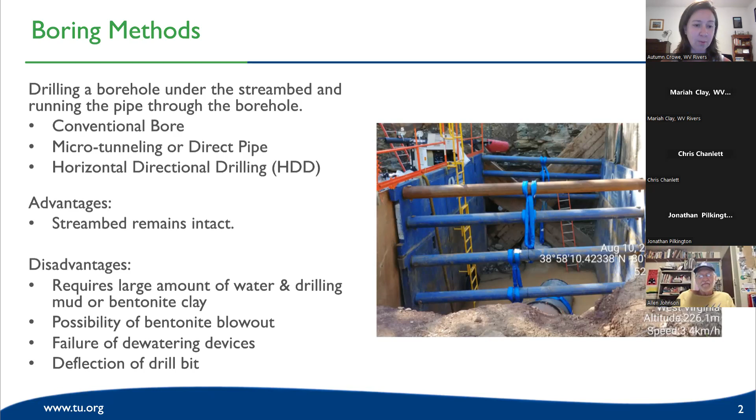The advantages of boring is that the stream bed remains intact. But the disadvantages are that it requires a large amount of water and drilling mud or bentonite clay. There's a possibility of a bentonite blowout, a frack out, or inadvertent return - it's labeled different things in the industry. There can also be a failure of a dewatering device, and I'll explain what that is. There's also a possibility that the drill bit could get deflected from a large boulder.

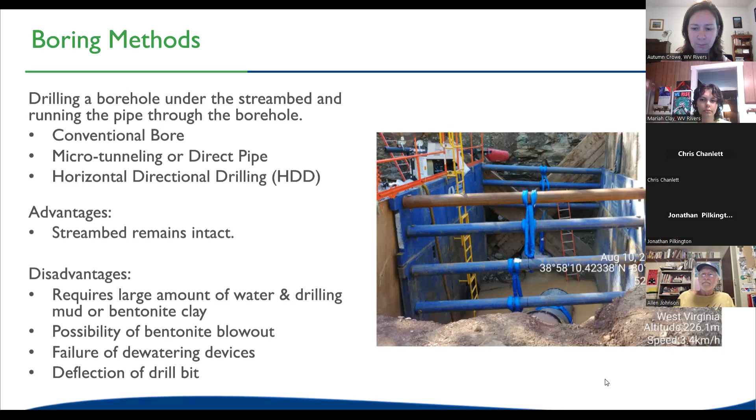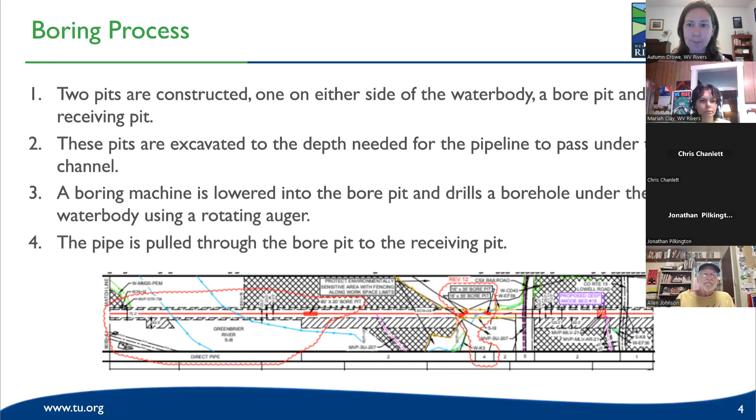So the boring process: there are 2 bore pits that are constructed, one on each side of the water body - the bore pit and the receiving pit. These pits are excavated to the depth needed for the pipeline to pass under the stream channel. A boring machine is then lowered into the pit and drills a borehole under the water body using a rotating auger. The pipe is pulled through the bore pit to the receiving pit.

This is an example of the schematic for the Greenbrier River crossing. If you can see my arrow, on river left is the excavated bore pit where the boring will occur, and then moving through under the river to river right to the receiving pit.

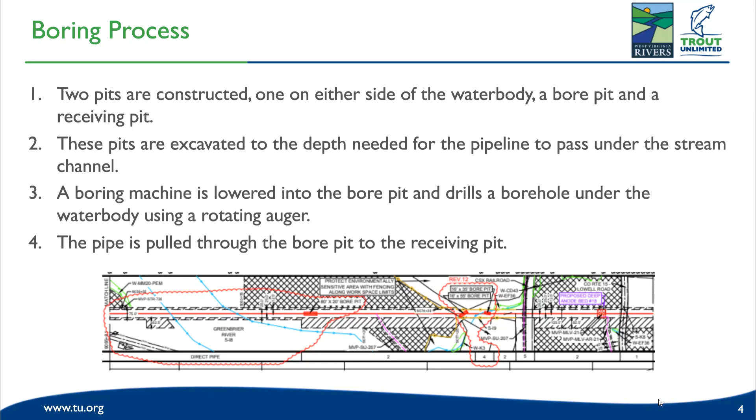So Mountain Valley Pipeline is planning to use the direct pipe boring method. This is a micro tunneling boring machine that installs the pipe in one single pass. This method uses lower pressure than the horizontal directional drilling, but the drill bit is subject to deflection from cobbles or boulders greater than 14 inches. Operations must continue nonstop to prevent the tunnel from collapsing. It also requires 1 million gallons of water mixed with a bentonite clay slurry used to lubricate the drill bit.

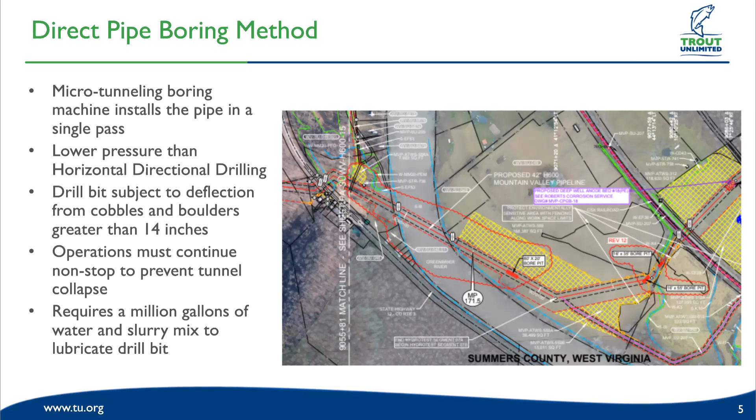For the Greenbrier crossing in particular, there are several problem areas where construction could go awry and issues could occur. They're boring 1,250 feet diagonally under the Greenbrier River, 13 feet below the river bottom. Like I just mentioned, they're using water withdrawn from the Greenbrier River, mixed with that clay to lubricate the drill bit.

The bore pits will be approximately 10 to 13 feet deep and 20 to 80 feet in length. At the starting pit, it's going to be 80 feet in length, and the receiving pit would be 20 feet in length. So those are quite large pits.

Pumping to dewater the bore pits will be required 24/7, and has potential to exceed the capacity of the dewatering devices. Those bore pits are going to be under the water table, so they're going to fill with water, and pumping will be needed to dewater them. Like I mentioned, the drill bit is subject to deflection from cobbles and boulders greater than 14 inches - so as they're drilling, if they hit a big boulder, it could steer the drill bit in a different direction.

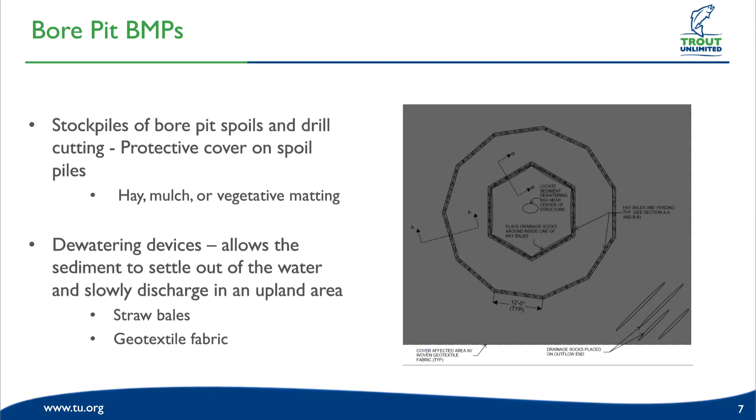And that dewatering device, there's a picture of it here that's in their plan. So there's a sediment dewatering bag within the center of the structure, and then there's two rings of straw bales with geotextile fabric. It's designed to contain all of that muddy water to keep the muddy water from entering the river. And then there's some drainage socks placed on the outflow area.

So potential impacts from borings. Mountain Valley Pipeline has already done some borings along the route in West Virginia, and we've seen those go wrong. As I mentioned, the groundwater enters the trench or the bore pit and produces the sediment-laden water. They pump that water out into a dewatering device. But if those devices are not sized properly, or they're not designed properly, or not built properly, then they're subject to failure. And that would release sediment-laden water into the stream or river and create a violation of water quality standards.

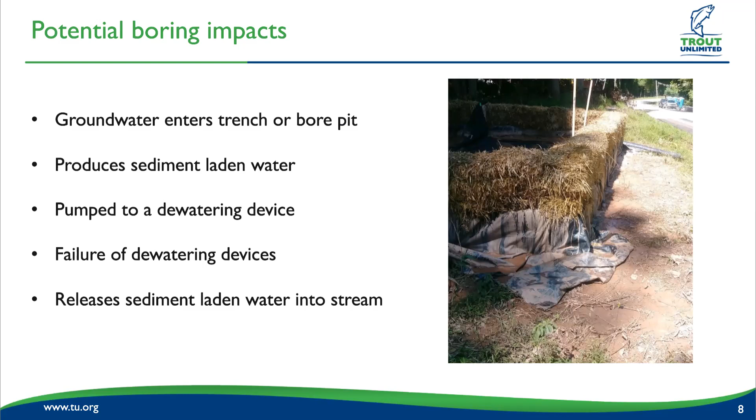There's also a possibility with all of the drill cuttings and the soil that they're excavating. There's a possibility of improper handling of that, or not having the proper BMPs to protect that. And if precipitation interacts with those drill cuttings or soil piles, then there's a potential for runoff and sedimentation and erosion.

And then the clay slurry mix that is going to be used to lubricate the drill bit, there's a massive amount, 1 million gallons potentially of this clay slurry. And we've seen on other pipeline projects that slurry can easily get out of hand and pollute a wetland or water body. So all of that is going to have to be handled properly.

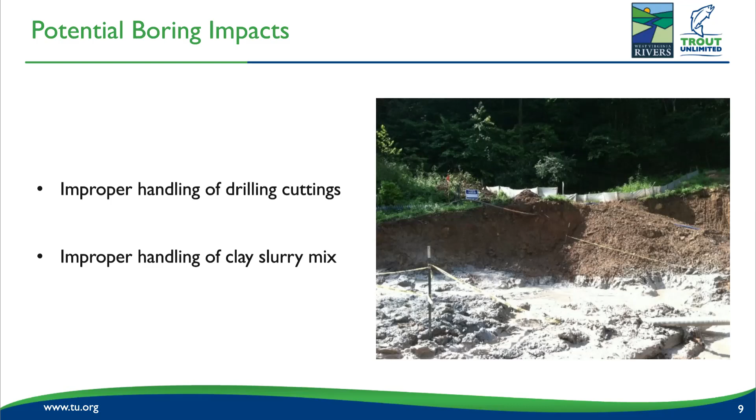And I mentioned this earlier, the bentonite blowout. So that is if there is a fracture in the bedrock when they are doing this drilling under the river with all of this bentonite clay. If that bentonite enters a fracture and is able to release into the water body, that's what's called a bentonite blowout, or an inadvertent return, as it's known in the industry.

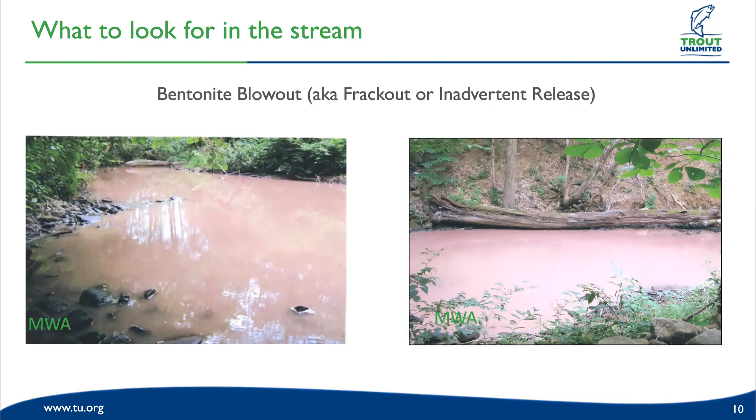So with that, I'm going to hand it over to Mariah, and they can explain how we at West Virginia Rivers have developed this StreamWatch app that can help citizens report potential pollution as they are observing the construction out in the field.

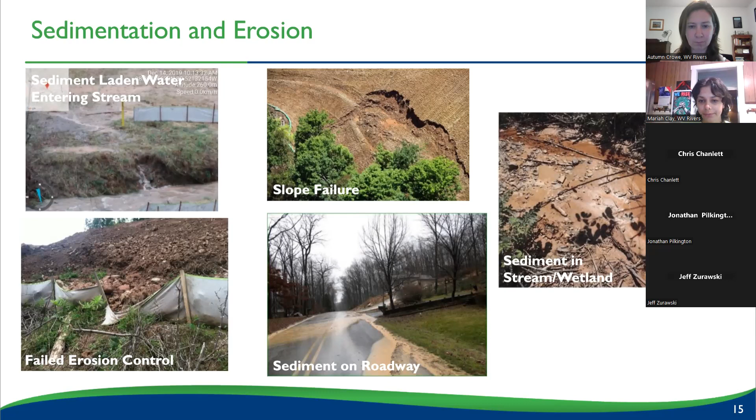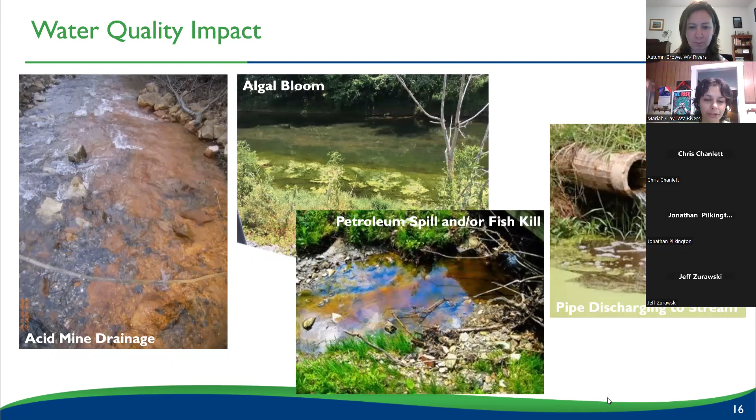And moving on to water quality impacts, these can have severe consequences on the ecosystems. These examples include acid mine drainage, algal blooms, petroleum spills, and potential fish kills. Also pipes discharging pollutants into the stream, which you can see pictured there. The next is solid waste. This can include litter in the stream, open dumps, tire dumps. Each of these disturbances can harm the environment and wildlife in different ways. Some disturbances you might encounter are not directly related to Mountain Valley Pipeline construction, but they're still important to document and submit.

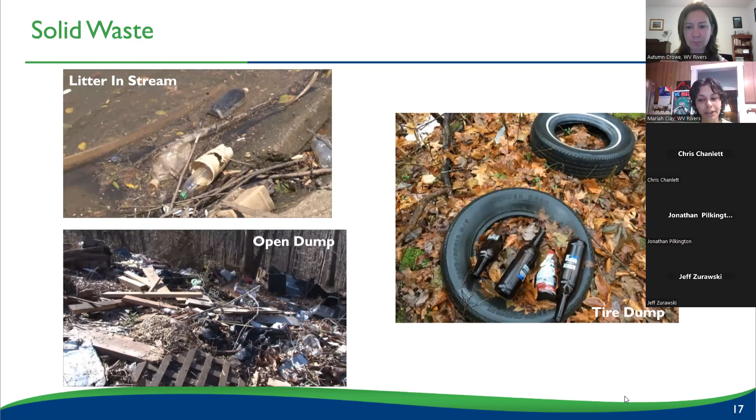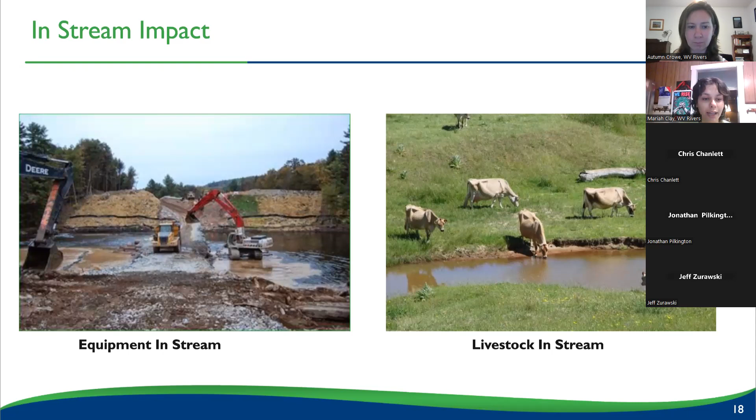In-stream impacts, these are crucial to monitor. We look for equipment in the stream and also things like livestock entering the water. Environmental regulations often restrict the use of heavy equipment in streams to prevent sedimentation, erosion, all these things that cause habitat disturbance. However, some permits may allow for a single pass of equipment in streams under specific conditions. This one pass rule typically permits equipment to enter the stream to place construction materials like timber mats, which I'm sure you all have seen and are familiar with.

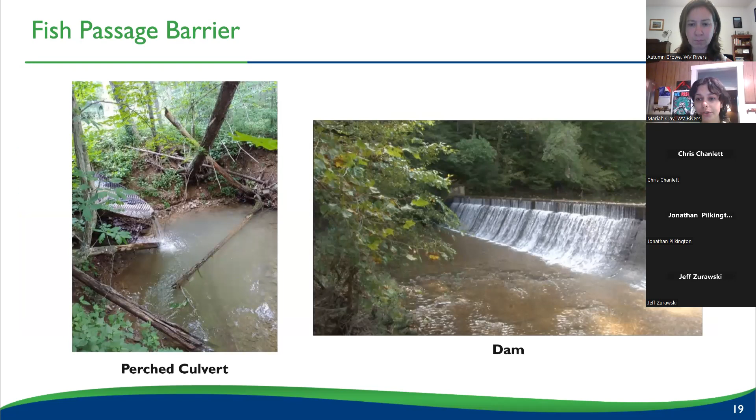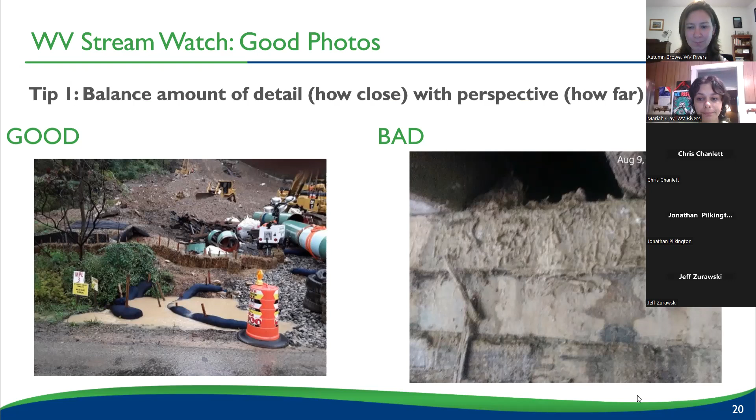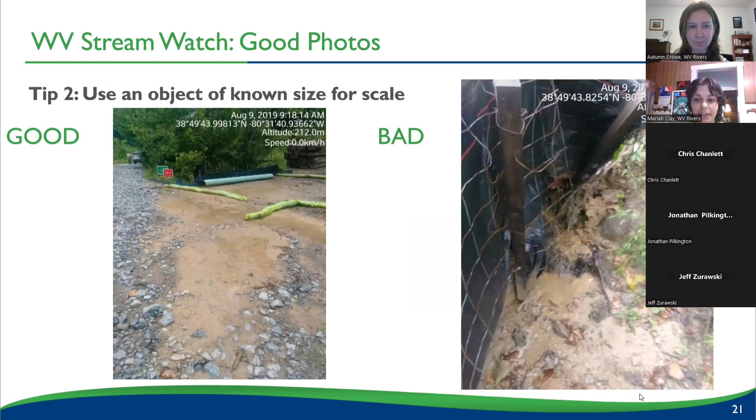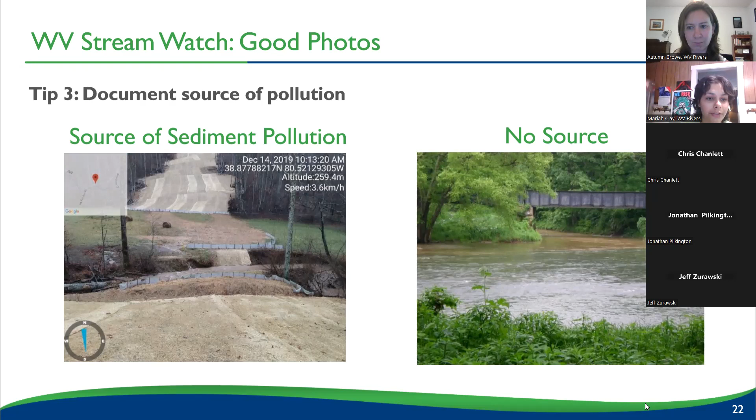And documenting pollution sources. Remember to document and photograph the source of the pollution. This provides vital context and helps us address the issue effectively. So in the picture on the left, we have the source of sediment pollution, and in the picture on the right, we see the pollution, but we can't identify the source in that picture. So hopefully that gives you context of what we're looking for when you're out in the field doing these submissions.

Okay, so I know that was a lot of information, and I saw some questions coming in. So let's start with those questions that are in the chat, and then if you have additional questions, you can drop them in the chat, or once we get through these, there'll be an opportunity for you to unmute yourself and ask additional questions. So yes, it's 1 million gallons of water that is approved to be withdrawn from the Greenbrier River. So that's 1 million gallons, not 1,000. Okay, that was already answered. What other questions do we have in the chat?